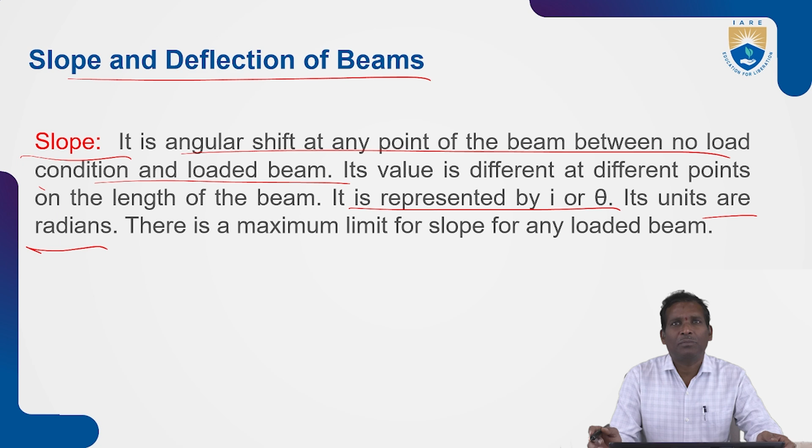Its units are radians. There is a maximum limit for slope for any loaded beam. What about deflection? It is the vertical shift of a point on the beam between the unloaded condition and the loaded beam. Its value is different at different points on the length of the beam. It is represented by Y or delta, and its units are mm. There is a limit for maximum deflection for any loaded beam.

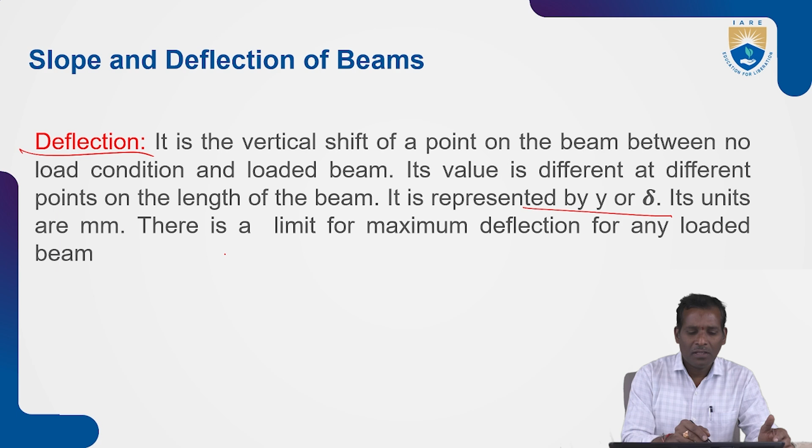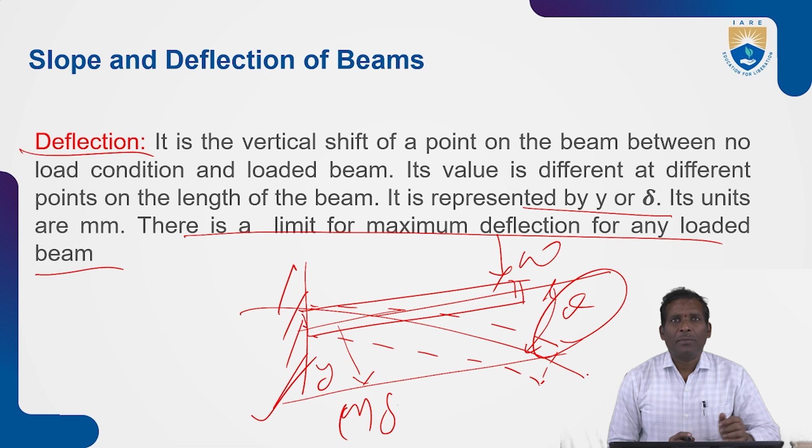So suppose you take a cantilever beam. Whenever it is subjected to load, the deflection occurs like this. It means there is an angular shift, that is theta, and a vertical distance, that is y or delta. This is called deflection, and the angular shift is called slope. There is a maximum limit for maximum deflection for any loaded beam.

Now we will discuss methods for slope and deflection at a section. Though there are many methods to find out the slope and deflection at a section in a loaded beam, the following two methods are important from the subject point of view: the double integration method and Macaulay's method.

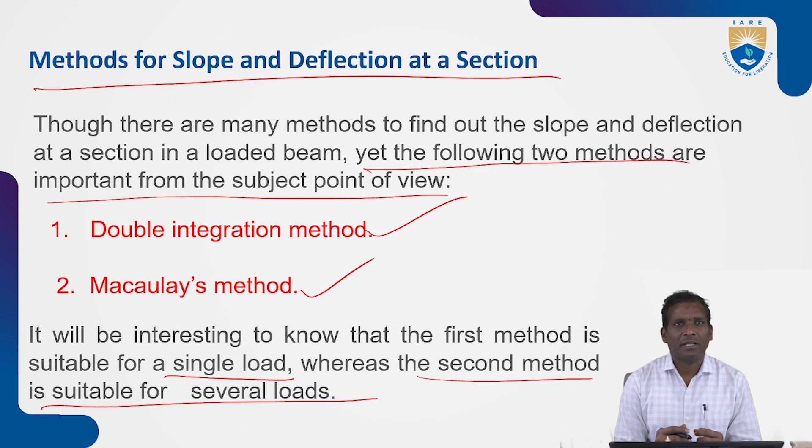It is interesting to know that the first method, double integration method, is suitable for a single load, whereas the second method, Macaulay's method, is suitable for several loads. Whenever the beam is subjected to a single load, the double integration method is used. When the beam is subjected to several loads, Macaulay's method is suitable.

First we will see the double integration method for slope and deflection calculation. What is this method, how do we calculate it, and what are the equations and how are they derived? In this double integration method, the bending moment at a point: already in the previous session, we derived M equals EI into d square y by dx square for a simply supported beam.

Integrating the above equation, and integrating it once again, that is double integration, we get the equation: double integral M equals EI into y. So the bending moment at a point, M equals EI into d square y by dx square, integrate and double integrate.

It is obvious that after the first integration of the original differential equation, we get the value of slope at any point. On further integrating, we get the value of deflection at any point. So the first integration of the original differential equation gives us the slope, and the second integration gives us the deflection.

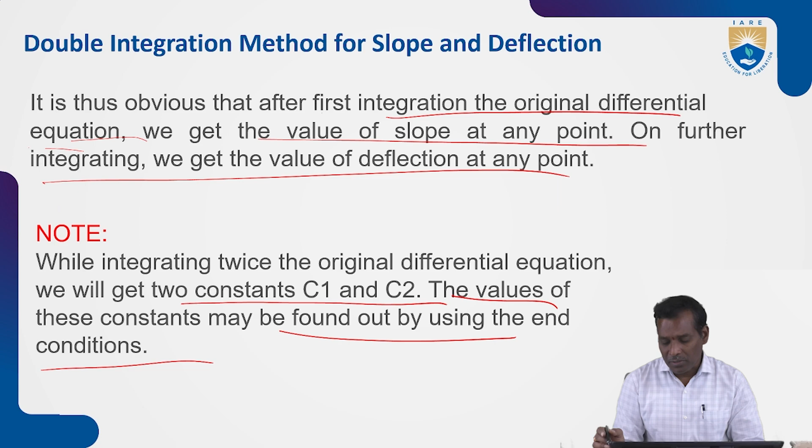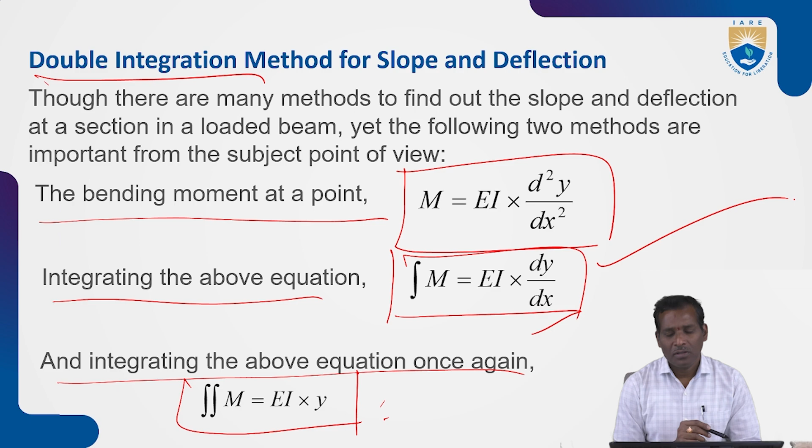While integrating twice the original differential equation, we get two constants, C1 and C2. The values of these constants may be found out by using the end conditions, that is, boundary conditions or constraints. After calculating C1 and C2, substitute them into the integral equations to get slope and deflection. The first equation gives slope, and the second gives deflection.

Now we will see the case for a simply supported beam with a central point load. This is a simply supported beam. These two ends are supported, A and B, and at C the load is acting at its midspan, W by 2 on each side, with distances L by 2 and L by 2.

Take one section, cross section at a distance x. Consider simply supported beam AB of length L carrying a point load W at the center of beam C, as shown in figure. From the geometry of the figure, we find the reaction at A.

First calculate the reaction at A. In this figure, this is the deflection at point C. The reactions at A and B, RA equals RB equals W by 2. This is because the load acts at the center, so the upward loads equal the downward loads: Ra plus Rb is equal to W.

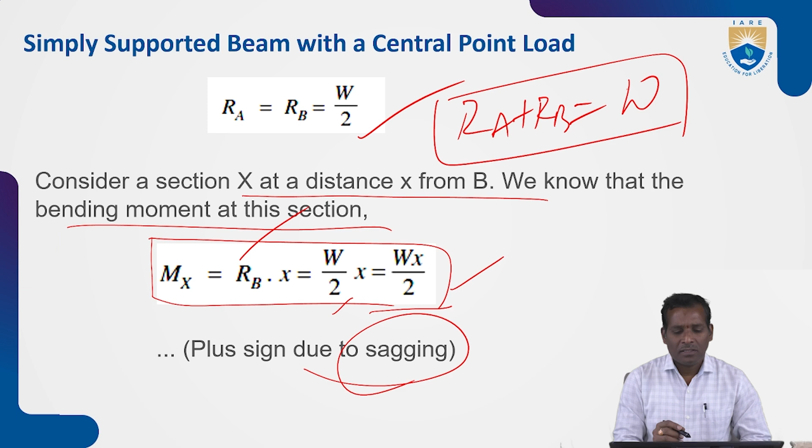Consider a section X at a distance x from B. We know that the bending moment at this section, Mx, is equal to Rb multiplied by x, that is W by 2 into x, which gives Wx by 2. The plus sign is due to sagging.

Therefore, the bending moment at section x: we already know that M is equal to EI into d square y by dx square. So at the x section, Mx is equal to EI into d square y by dx square, that is equal to Wx by 2.

So integrating the above equation: now integrate EI into d square y by dx square equals integral of Wx by 2. After integration, taking EI outside as constant, integral of d square y by dx square gives dy by dx, that is equal to W into x square by 2 into 2, plus C1.

C1 is obtained from the first integration. So again do the double integration. C1 is the first constant of integration. Now we apply the boundary conditions to find the value of C1.

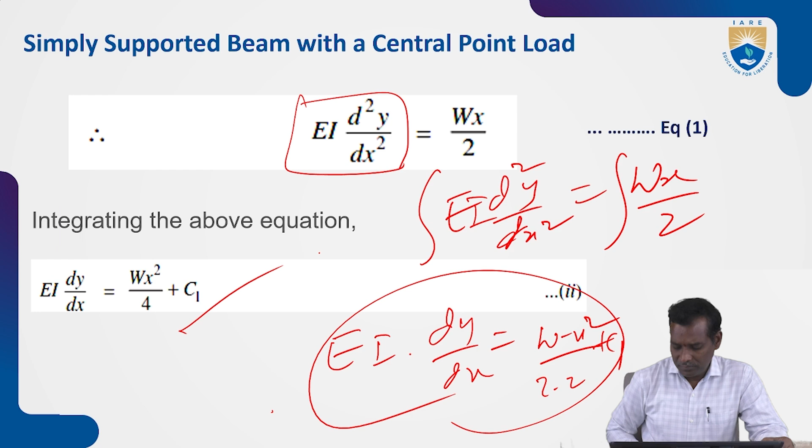Both boundary conditions apply at x equal to L by 2, where dy by dx, the slope, is equal to 0. As the maximum deflection is at the center, the slope at the center will be 0. So substitute these values in equation 2.

What is this equation? 2 EI into dy by dx is equal to W into x square by 4 plus C1. Here dy by dx is 0, so EI into dy by dx equals 0 at x equal to L by 2. Wx square by 4 gives WL square by 16 plus C1. So C1 equals minus WL square by 16.

Substitute this value of C1 in equation 2: EI into dy by dx equals Wx square by 4 plus C1, where C1 is minus WL square by 16. Substituting gives Wx square by 4 minus WL square by 16. This is the required equation for the slope at any section.

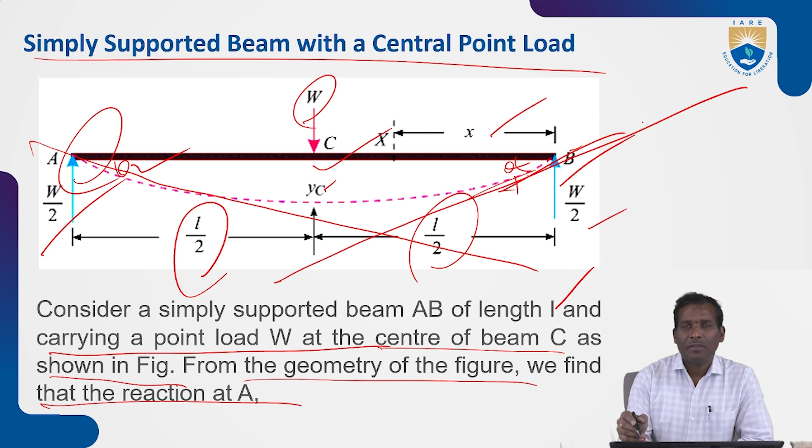Why the negative sign here? The minus sign means that the tangent at B makes an angle with AB in the negative, or anti-clockwise, direction, as shown in the figure. That's why IB is negative.

Integrating the above equation, we first get the slope at A and B after completing the first integration. In this, C1, the first constant of integration, was already calculated. Then integrating the equation once again, EI into Y is equal to Wx cube by 12 minus WL square into x by 16 plus C2.

EI into Y: taking equation 3, EI into dy by dx equals WL square by... integrating, you get EI into Y equals Wx cube by 12 minus WL square into x by 16 plus C2, where C2 is the second constant of integration.

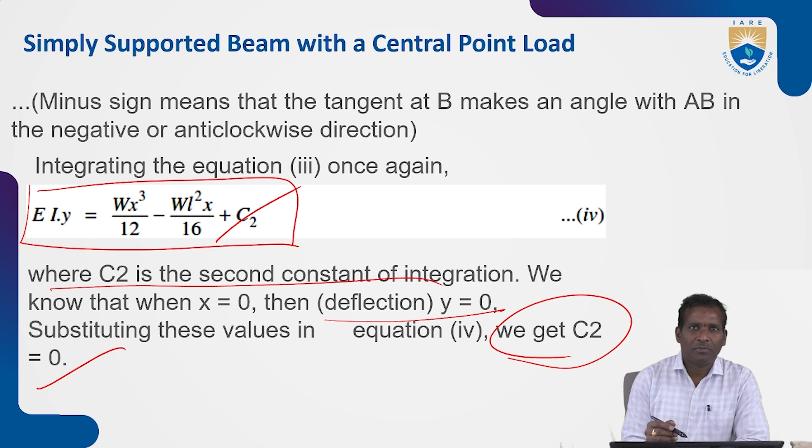We know that when X is equal to 0, the deflection is 0. Substituting this in the equation, we get C2 is equal to 0. So now you get EI into Y, after substituting the C2 value, as WX cube by 12 minus WL square into X by 16.

A little consideration will show that the maximum deflection occurs at the midpoint C. Thus, for the maximum deflection, we substitute X is equal to L by 2 in equation 5.

So deflection occurs at midpoint C, so substitute X is equal to L by 2 in the above equation. So EI into Y is equal to WL cube by 12 minus WL square into L by 16.

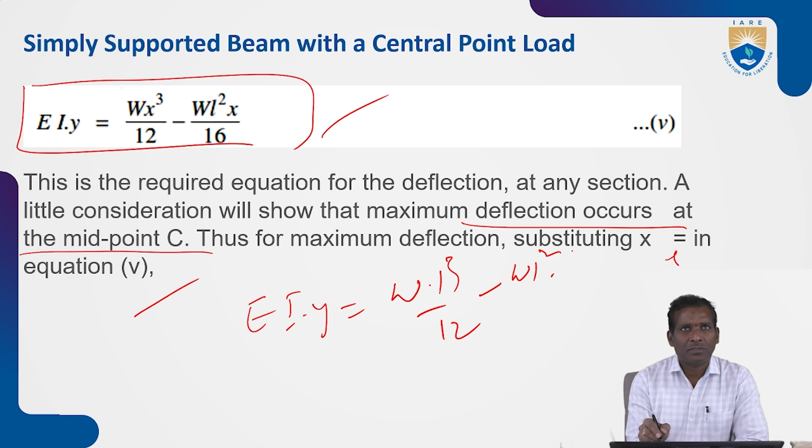After simplification, WL cube by 96 minus WL cube by 32 is equal to minus WL cube by 48. So at point C, the deflection we got is minus WL cube by 48. The minus sign means that the deflection is downwards.

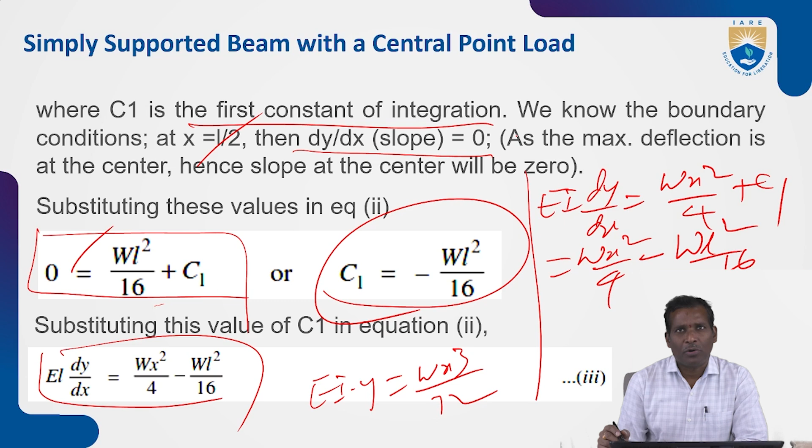So we got the deflection at C as WL cube by 48 EI, and the slope also we have calculated. For a concentrated center point load on a simply supported beam, the slope is WL square by 16 EI.

The maximum deflection is WL cube by 48 EI. These are the equations for a simply supported beam with a center point load, found by using the double integration method.

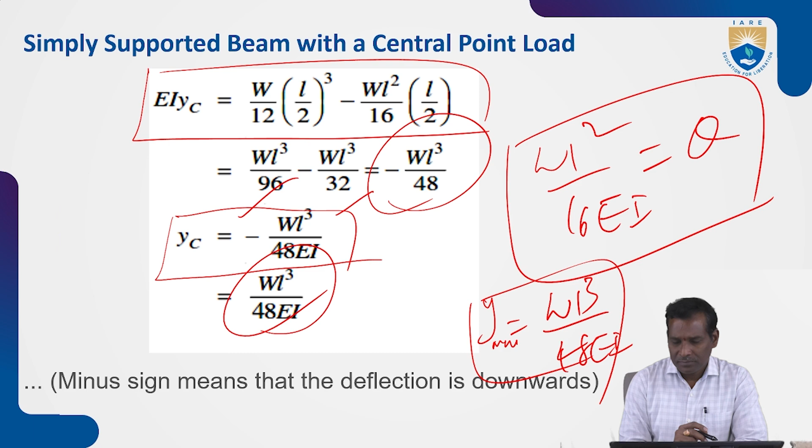Now we will see the simply supported beam with a uniformly distributed load. Here a simply supported beam is taken, length is L, and carrying a uniformly distributed load, UDL.

Here also the same procedure is applied. Take a section X at a distance small x from the B end. Consider a simply supported beam of length L carrying a uniformly distributed load of w per unit length. From the geometry of the figure, we know the reaction at A; first we calculate RA and RB.

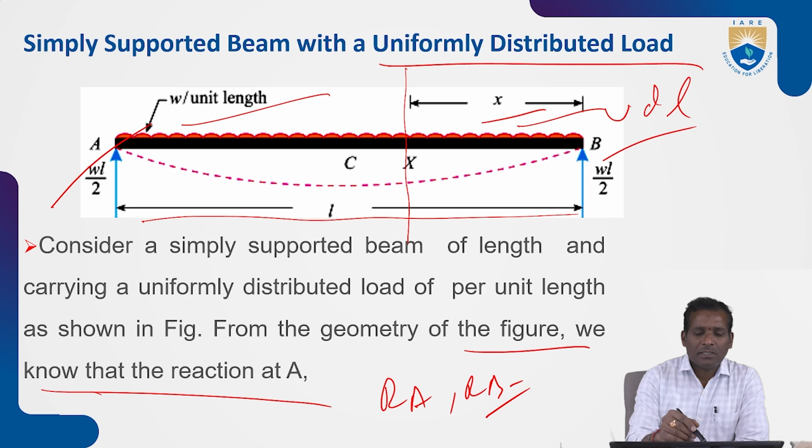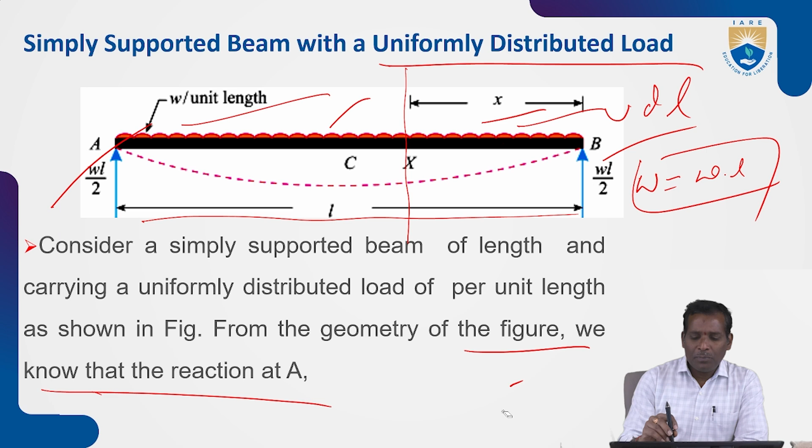So here RA plus RB is equal to WL. Why? Because here the type of load is UDL, so the UDL load is converted into a point load, which is why capital W is equal to w into L. So RA plus RB is equal to W into L.

Now calculate the reaction forces at A and B. RA is equal to RB is equal to WL by 2. Consider a section X at a distance small x from B. We know that the bending moment at this section is W into Lx by 2 minus wx square by 2.

Now write down Mx, the bending moment at x: EI into d square y by dx square is equal to WLx by 2 minus wx square by 2.

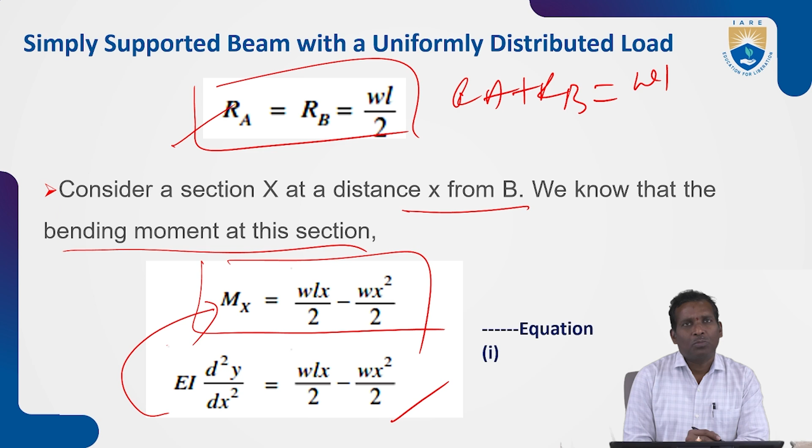Now integrate this equation to get the slope. You get a constant C1, and find this C1 constant by using boundary conditions. Integrating the above equation, EI d square y by dx square is equal to WLx by 2 minus wx square by 2.

So integrating, d square y by dx square becomes dy by dx, with EI as the constant. wx square by 2 integrates to wx cube by 6, and similarly WLx by 2 integrates to WLx square by 4. So integral EI d2y/dx2 equals integral of WLx by 2 minus wx square by 2, giving this equation with the constant C1, the first constant of integration.

Where C1 is the first constant of integration. We know that at x equal to L by 2, dy by dx is equal to 0. Substituting these values, dy by dx is 0 and x is L by 2.

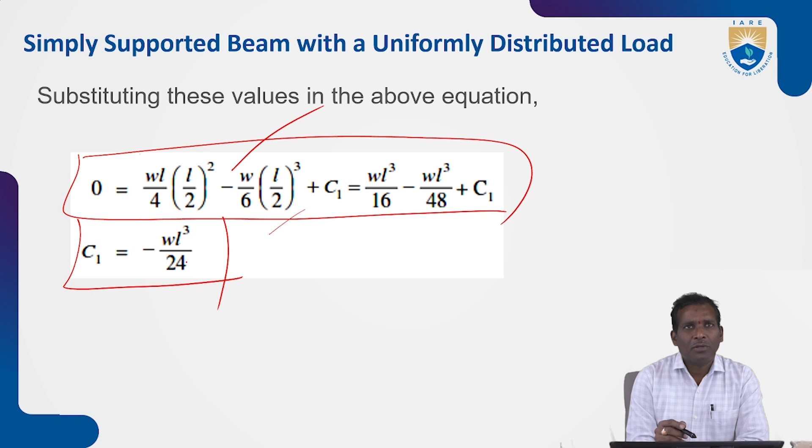After simplification, C1 is minus WL cube by 24. Now substitute this value in the second equation: EI into dy by dx is equal to WLx square by 4 minus wx cube by 6 minus WL cube by 24.

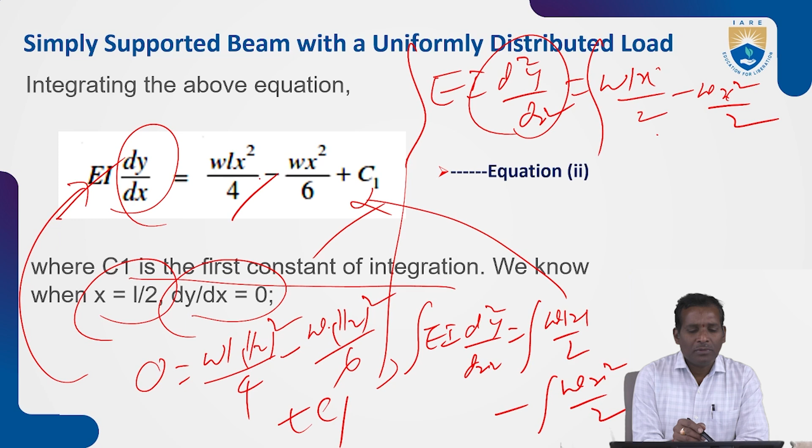After substituting C1 — before substituting, the equation is EI into dy by dx equals WLx square by 4 minus wx cube by 6 plus C1. After substituting, we get this equation, which is the required equation for the slope at any section.

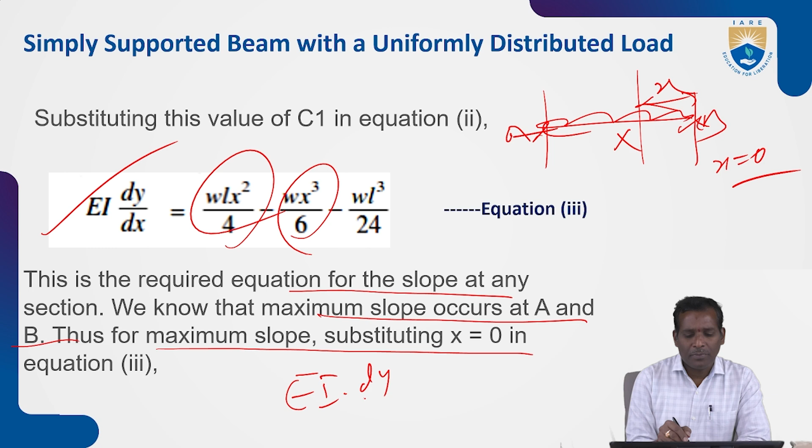We know that the maximum slope occurs at A and B. Therefore, for the maximum slope, substitute at A and B — suppose this is the simply supported beam A and B, at this section x is small distance, x is equal to 0. In equation 3, substituting x equal to 0, we get EI into dy by dx is equal to minus WL cube by 24.

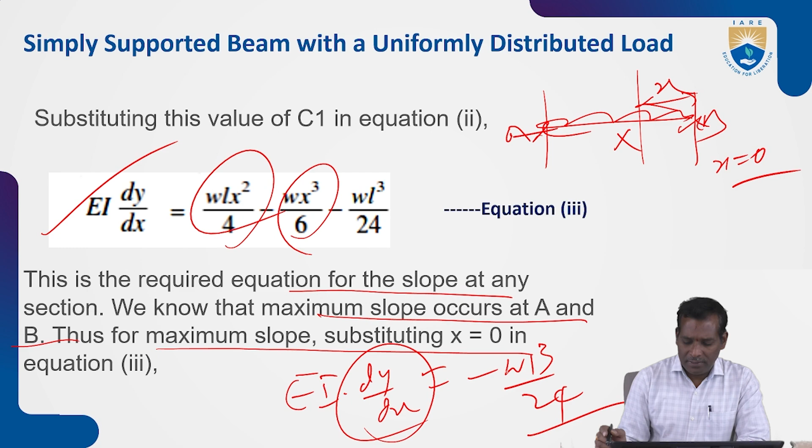So the dy by dx, you can write, that is the slope of the beam at point B, that is theta at B, or theta B.

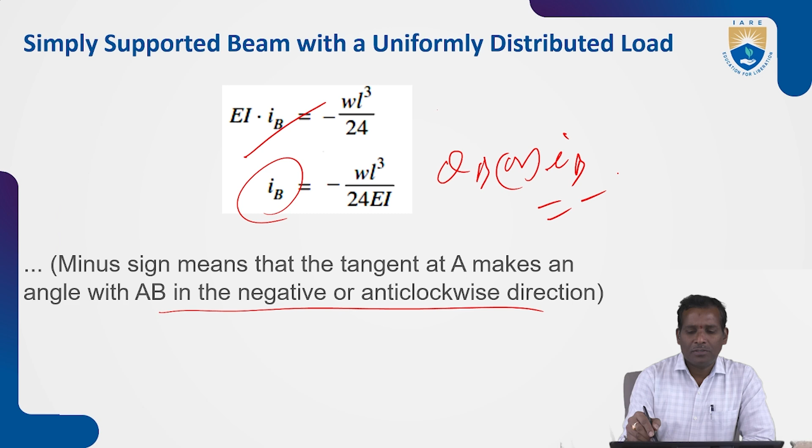Therefore, the slope at B is minus wl cube by 24 EI. The minus sign means that the tangent at A makes an angle with AB in the negative or anti-clockwise direction. So this is theta B, or i B, that is equal to minus wl cube by 24 EI.

So now integrating the equation once again, you will get deflection EI into Y is equal to small wL into x cube by 12 minus wx to the power of 4 by 24 minus w L cube into x by 24 plus C2, where C2 is the second constant of integration.

We know when x is equal to 0, then y is equal to 0. Substituting these values in equation 4, we get C2. Substitute x is equal to 0 and y is equal to 0. So the C2 will get 0. Therefore, substitute C2 is 0 in this equation.

You will get EI into Y is equal to wLx cube by 12 minus wx to the power of 4 by 24 minus wL cube into x by 24. So this is the required equation for the deflection at any section.

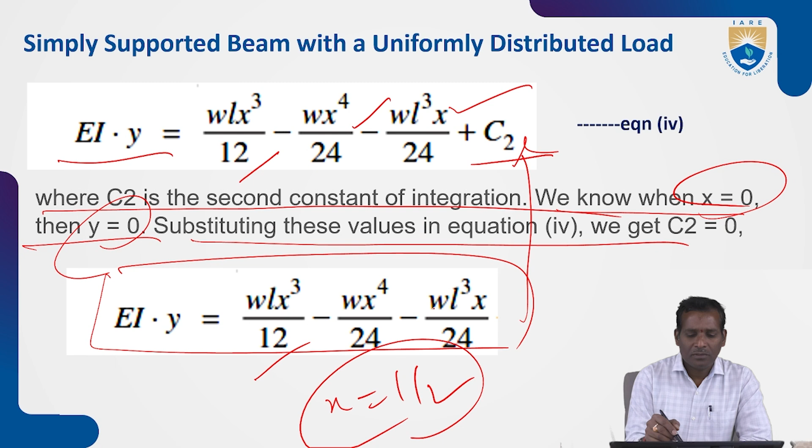So now you can write EI into YC is equal to wL by 12 into L by 2 whole cube minus w by 24 into L by 2 to the power of 4 minus wL cube by 24 into L by 2. So in this equation substitute L by 2. After simplification you will get 5wL to the power of 4 by 384 EI.

So this is the final equation for deflection, 5wL to the power of 4 by 384 EI. Here the minus sign means that the deflection is downwards.

Note, the above expressions for slope and deflection may also be expressed in terms of total load, such that W is equal to, capital W is equal to small w into L.

So the slope equation is, as already written here, at B and A. At B, wL cube by 24 EI. At A, wL cube by 24 EI. Why? Because due to the symmetry, both are the same for a simply supported beam at their ends. The slope is equal.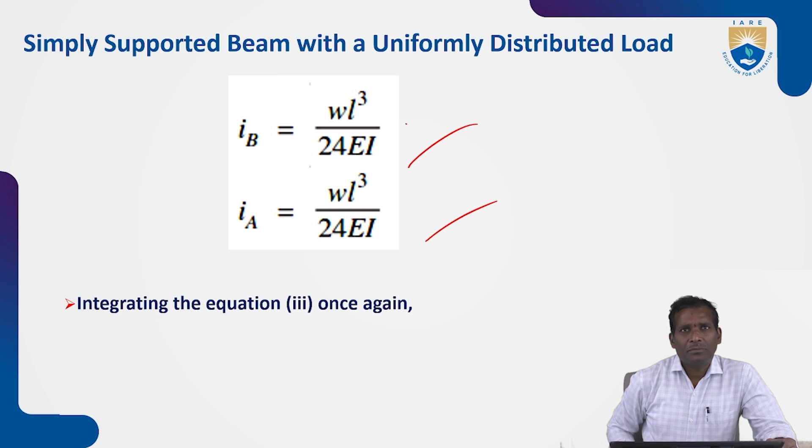So the slope and deflection may be expressed in terms of total load. The total load is w into L. So you can write again this equation wL square by 24 EI and 5wL cube by 384 EI. Previously, 5wL to the power of 4 by 384 EI. So now you can write capital W is equal to wL, in place of w.

So now here you can write w into L cube into L. So you can substitute w into L is equal to capital W. So that you can write the equation as 5WL cube by 384. Here also capital WL square by 24 EI.

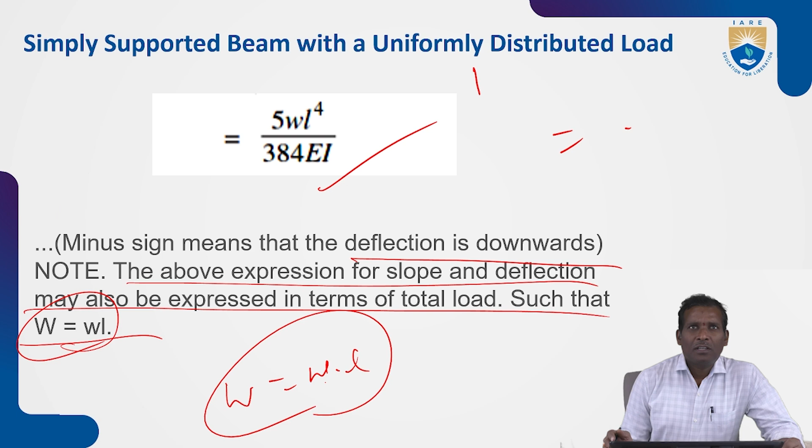So like this, you have to calculate the slope and deflection of a simply supported beam with concentrated load and with uniformly distributed load by using the double integration method. First you integrate the differential equation to get the slope, and then a second integration to get the deflection.

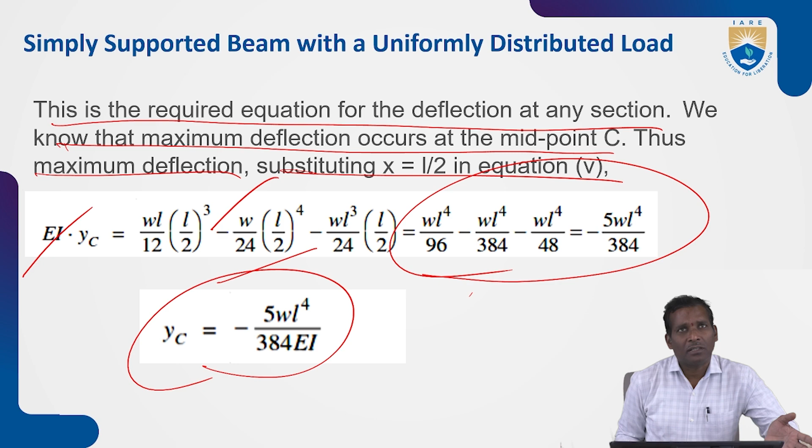After calculation of C1 and C2, the constants, substitute these values in their equations, and then you will get the final equations for slope and deflection for a simply supported beam, or any beam. So here we have taken a simply supported beam.

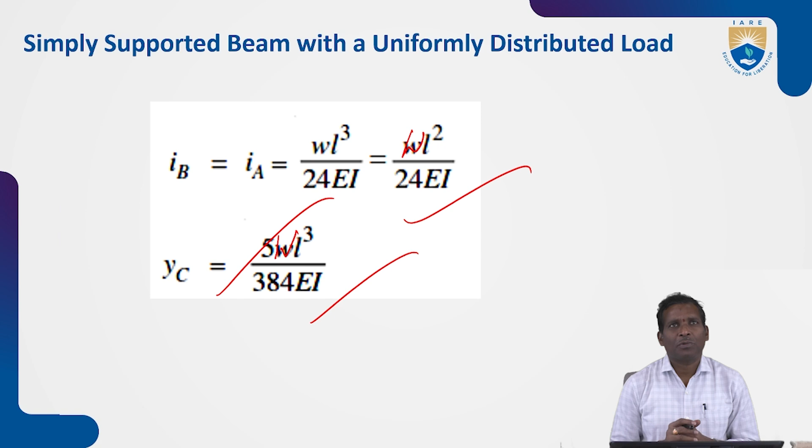You can calculate for a cantilever beam, a simply supported beam with eccentric load, and a cantilever beam with UDL. So the same procedure you can apply and calculate.